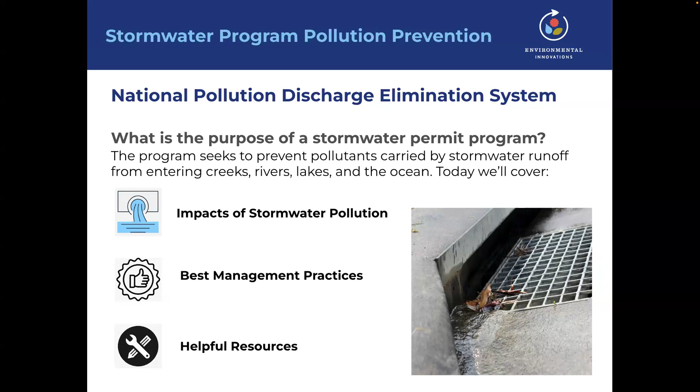So what are common sources of pollution in stormwater? These types of pollutants can come from businesses, public streets, and residential areas. The challenge of mitigating stormwater pollution comes from both the many types of pollutants and the wide range of sources.

Our streets are particularly dirty. Brake pads contain copper, which wears off with use and contributes to stormwater pollution. And grease and oil are transported to surface waters in stormwater runoff from runways, roadways, and parking lots. Other pollution sources include runoff from construction sites and land where metal-containing sludge, fertilizers, and pesticides have been applied.

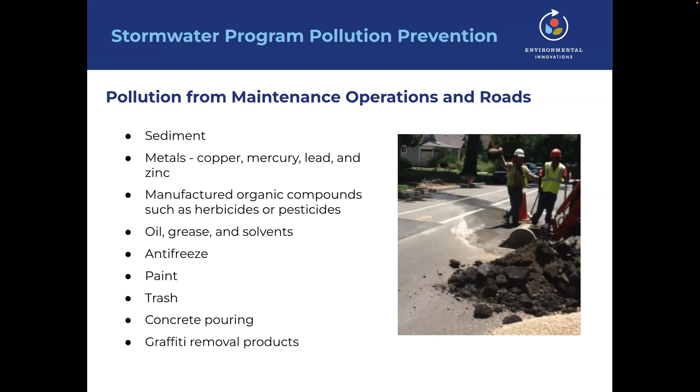One major source is concrete repair, which goes on all the time, and can produce high alkaline wastewater with a pH of above 12. So the impacts of stormwater pollution include risks to public health and degradation of waterways. The economic impacts are essentially the costs associated with managing the public health risks and the degradation of the waterways.

So now that we've identified the threats to stormwater, what are some solutions that have been found to mitigate pollution on a program-wide scale? Again, the difficulty with stormwater is it sort of comes from everywhere. So unlike point source pollution coming from a factory, it's hard to treat before it reaches our waterways. So there are many approaches, but these BMPs can be implemented by businesses at their facilities.

They include integrated pest management, careful mobile cleaning, implementation of low-impact development structures, which retain the water on site, and the protection of storm drains at all times. So when those maintenance activities are occurring out in the world, the storm drains are always considered and protected.

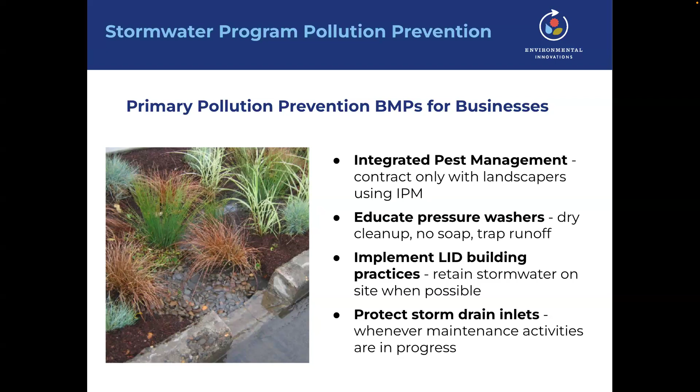So I want to spend a few minutes talking about integrated pest management because chemical pesticides tend to be over applied and they can persist in the environment for quite a while, and they kill or affect aquatic life. So effective IPM programs take a holistic approach and identify the life cycle and interactions of a pest with its environment. And just knowing that seeing a bug is not necessarily a problem that calls for action, as 90% of the insect world is beneficial.

IPM considers all available pest control methods, and a pest management plan is developed. And the plan attempts to use the most economical means with the least possible hazard to people, property, and the environment. So that would include things like finding physical barriers and things like that, as opposed to always reaching for the chemicals.

An IPM plan assesses the severity of the situation. Is it tolerable? Is it temporary? Did we welcome the problem? Cockroaches, ants, fleas, rodents all love food, water, and shelter. So identifying how to remove the attraction without using chemicals is the aim of the management plan.

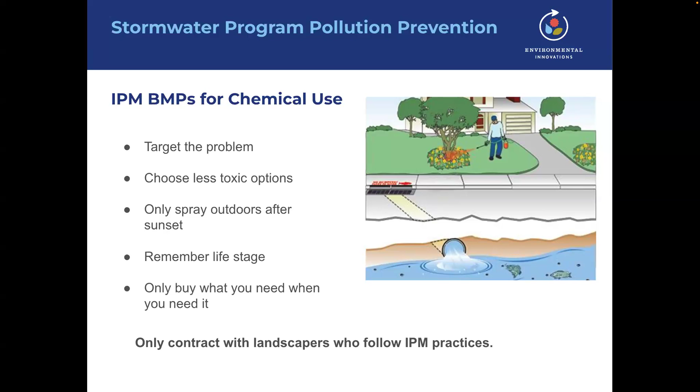And remember, this one is really important and is a big focus of IPM, which is remember the life stage of the pest. Some chemicals are designed to work when the pest is in the egg stage or the larval stage or the adult stage. If you apply something that isn't directed at the correct life stage, then it's not going to be effective at all, and you've just added chemicals to the environment for no reason. And if those BMPs are followed, the volume of chemicals used can be greatly reduced, which is the aim.

So pressure washers are another area where making sure that they understand how their actions affect stormwater or runoff that goes into storm drains is really, really important. Pressure washers can create a high volume of contaminated runoff. So it's important to contract with pressure washers and mobile cleaners, so maybe people who are doing mobile car washing, that kind of thing, who know how to keep contaminated water

out of storm drains. So there's a BMP fact sheet and a video that you can use to help educate mobile cleaners that I'll share with you at the end of the presentation. And businesses, property managers, and others should require in writing that the washers follow these BMPs.

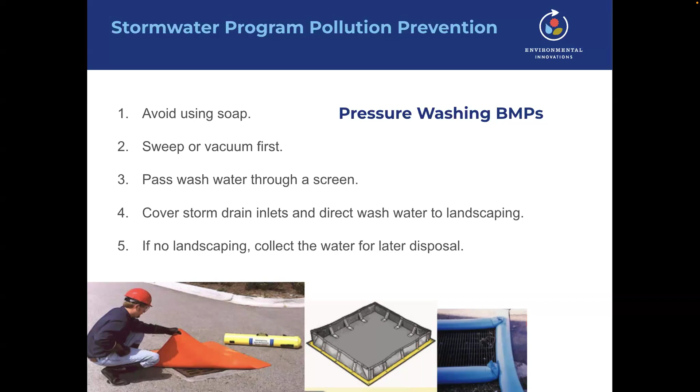So my favorite BMP is the low impact development. So these are structures that use plants and soil to capture and filter stormwater runoff, and allows clean water to recharge groundwater supplies. So it retains the water on site and sinks it, and lets the ground do the filtering. It's a little treatment that mimics natural processes in nature.

And so managing stormwater in this way is called low impact development, LID. And these development practices reduce stormwater runoff by keeping it on site via small scale stormwater technologies that mimic the way rainfall distributes in nature.

One example of an LID practice is this rain garden that you see here, which helps slow, capture, filter and infiltrate the water that runs off the impervious surfaces. So the design of the garden maximizes infiltration and retention. And then obviously it's placed in an area where the water will flow to it and sink in.

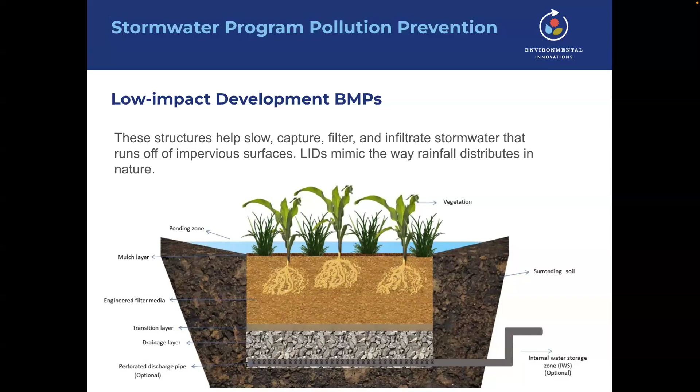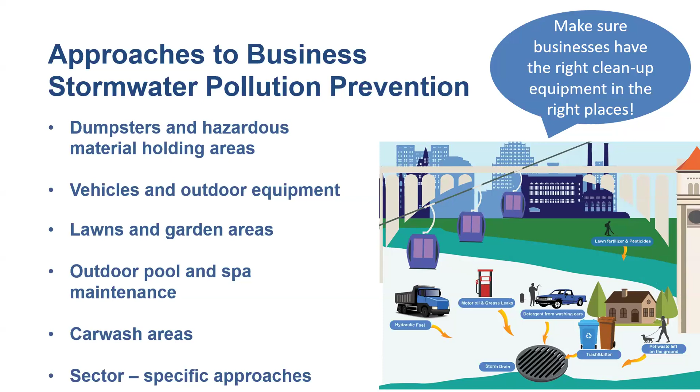Regularly inspecting and cleaning outdoor areas and picking up litter, debris, or cigarette butts are some of the best and easiest ways to reduce stormwater pollution. So you can invite a business to say, hey, who in your business is going to, once a week, maybe every 3 days, check the parking lots, check your sidewalks, check different areas of your building to make sure that there isn't that litter and debris, and that your outdoor areas aren't adding more pollution to our stormwater. So that's a basic that we talk to businesses about, regularly inspecting and cleaning outdoor areas and picking up that litter and debris.

Keeping surfaces clean by sweeping or mopping rather than using water. That is a measure in our checklist that we promote to businesses. Just making sure that whatever's on those mats or those surfaces is not being discharged into the storm drain, but rather into a sanitary sewer, if at all possible.

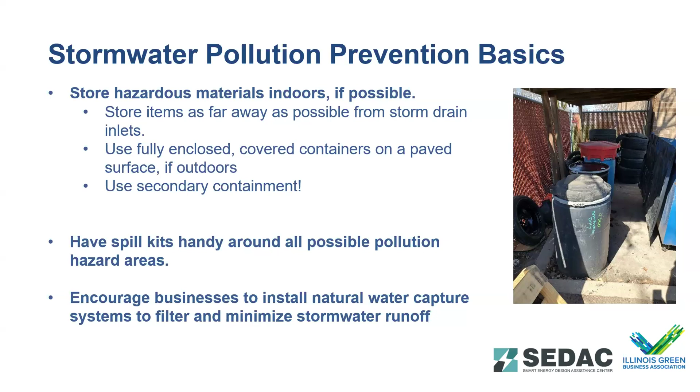It is not easy sometimes for a business to coordinate with their waste hauler to get new bins or get bins that are repaired. But working with your businesses to make sure that their dumpsters have tight fitting lids and those cracks or leaks are fixed is really important. We don't need any of that dumpster gunk going into our stormwater and going into our parking lots.

Thank you. So regularly cleaning litter and debris from these areas around businesses. I encourage businesses to do it daily. When you take out the trash, clean it up. Make sure that's a part of training and that your managers and owners are keeping on top of making sure that those dumpster areas are clean.

I know it's hard for some businesses, especially if they rent. They're sharing dumpsters with a lot of different people. And some businesses might not have the same best practices as the businesses that you're working with. So then I would recommend, say, let's go, and I'm happy to help you talk to your management about this and encourage other businesses to do the same.

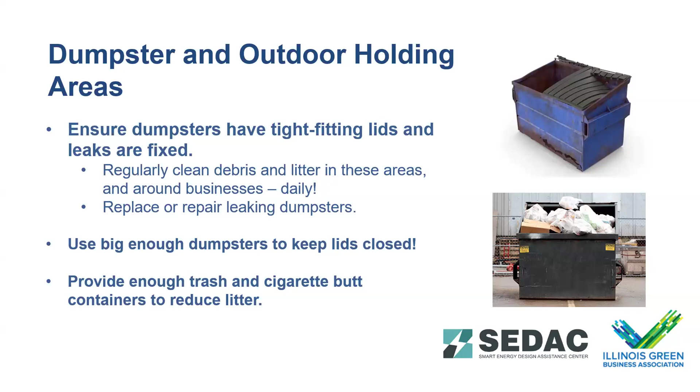So they had not only garbage cans closer to where those truck bays were, but also a big dumpster, and they informed their truckers and educated them: please drive to these dumpsters. There's garbage cans located here. Please don't dump in our parking lots. So providing enough trash and cigarette butt containers can really reduce that litter and reduce the amount of cleanup that your businesses and their employees have to do on their grounds.

Again, reminder signs are always a good thing. So having signage that guides employees on how to reduce the amount of pollutants entering the storm drains is a great best practice and a good reminder for staff. And then if you do have to rinse any containers, drain that into the sanitary sewer if need be.

And if a business does have a trash compactor, here's an example of a trash compactor, and here's a storm drain that's labeled, actually, right next to a trash compactor. Make sure those trash compactors are connected to the sanitary sewer and not the storm sewer. Please make sure that they are really not entering that storm sewer, if at all possible.

We don't have a lot of businesses that we work with that have trash compactors. We have some, but that's a best practice that I really make sure to emphasize with those folks that do have trash compactors. We don't want any trash goo going into our storm drains.

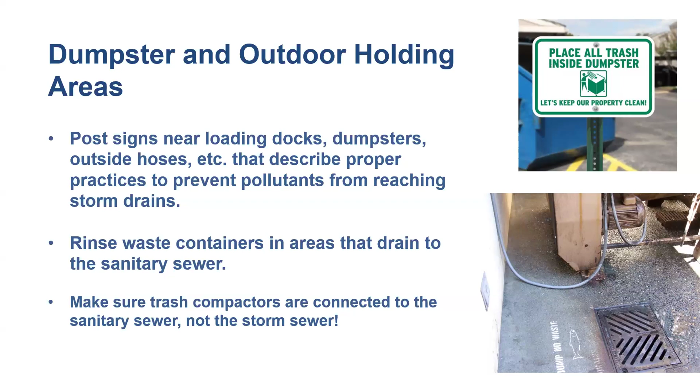All right, let's shift a little bit. Vehicles and outdoor equipment. Most businesses, or a good percentage of businesses, I'd say, have some sort of company-owned vehicles or outdoor equipment that they use. So one thing that we don't think about a lot when we're working with businesses is, where are they washing those cars? Are they filling their mowers or string trimmers in an area where a storm drain is located?

So we talk to businesses about fixing oil or other leaks in company vehicles and outdoor equipment to prevent spills. So advise your businesses, please don't fill your outdoor equipment in an area next to a storm drain. I know some people spill a little gas or a little diesel. That doesn't need to go down the storm drain. Make sure that you're in an area that not only is not near a storm drain, but that can be contained, and there's a spill kit available if those spills do happen. That's why I say, clean up the spills. Don't just leave it there. We talk to businesses a lot about that.

And also, when cars are being washed, make sure that that wash water is not entering the storm drains as well. If they are, there are some good berms and different things you can place around storm drains to reduce that commercial car wash water from going into the storm drains. But we also recommend that folks use safer cleaning solutions for car and truck washing.

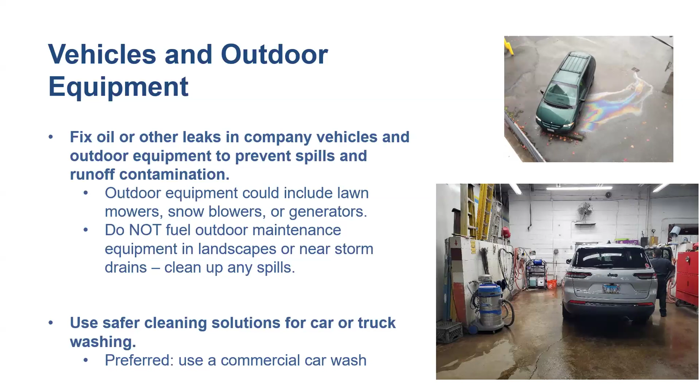Lawn and garden areas. Julianne really spoke about some great best practices around IPM and the use of fertilizers and outdoor pesticides. So I won't repeat a lot of that, but I'll just share some different best practices that we talk to our businesses about. So developing a policy that states that businesses will only use fertilizers and pesticides when needed.

That measure that I showcased earlier around working with their pest control companies at an as needed basis rather than a regular schedule. And I actually have a lot of businesses that take that on, that ask their pest company, do you use IPM practices? What is our schedule? And do we need this schedule all the time? Can we do it on an as needed basis rather than a regular schedule?

And we get that in writing from those pest control companies that our businesses work with. So we do have a lot of businesses that take this best practice on and make sure that they're using IPM best practices on their landscapes and inside their buildings.

Requesting a pest control and then using organic fertilizers. The OMRI label is one that I refer to a lot, and working with your landscaping companies to make sure that that is what they use. Making sure that you're also using mulch and compost in garden areas or planting areas rather than fertilizers. This is going to generally be regional on this practice.

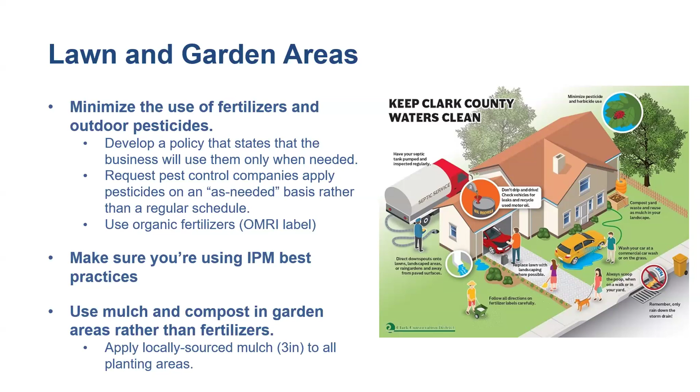In Illinois, we say at least locally sourced mulch 3 inches deep, but that also helps with reduced watering, which is also a benefit. But that is something that we talk about a lot with our businesses. Another thing that I didn't put in here is that we also talk to our businesses about making sure that if they have irrigation, that they check that system regularly and they're not overwatering, especially after fertilizers and other outdoor pesticides have been used. So that's another place where runoff can happen and those sorts of things can enter into our storm drains.

This is an example for lawn and garden areas, IPM tactics for ants. I know it's ant season here in Illinois right now. All the ants are coming out and we're finding out where they got in last time, and they make an appearance. But you know, things like first thinking about vacuuming, wet cleaning, pest proof areas and pest proofing, like caulking holes, fixing leaks, and cleaning up ant trails.

And then you go into biological. Can you do something outdoors rather than going to chemicals? So this is just an example of what Julianne was talking about in terms of timing, approaches, different strategies. But IPM, we should think about these things first and recommend these types of best practices to our businesses.

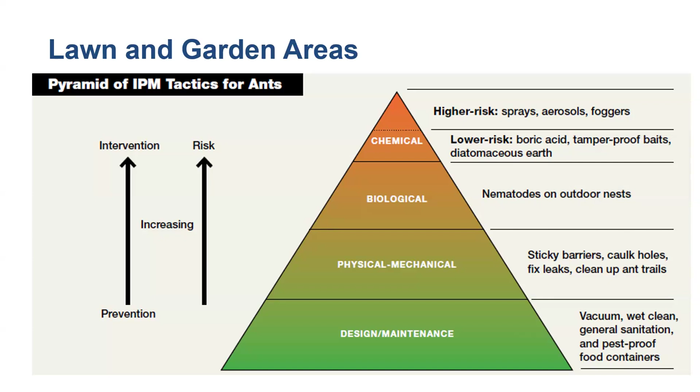Like, do you have good weather sealing around your warehouse doors that prevent pests from entering your buildings? Have you caulked those holes? Have you done things to pest proof your facility? And then what can be done biologically or chemically? And you can work with your pest control companies to determine these different strategies as well.

If vehicle washing is common, I think really recommending that they use a commercial car wash is the best practice. Since they have that filtration capability, they make sure that that water is not entering the storm drain. A commercial car wash is going to ensure that that water is going into the sewer system or being filtered before it enters our sewer system. So that's a really great best practice.

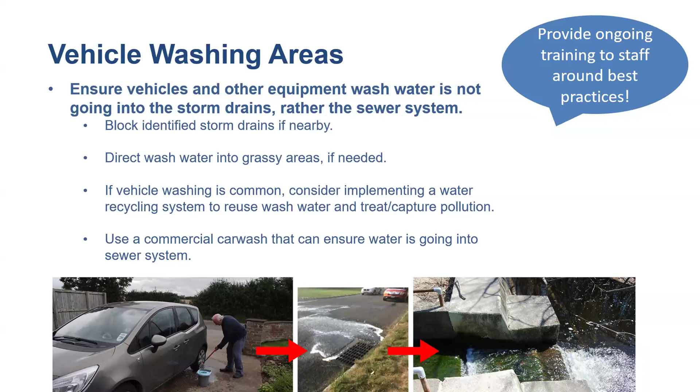It actually helps reduce the amount of spotting on cars if you use things that are biodegradable or phosphate-free and use those high-pressure nozzles. So if you've ever been in a car wash yourself personally, and you see you still have those flecks or spots on your car, and you've used the kind of soft wash rather than the pressure wash, that might be a symptom of not using high pressure nozzles, and it actually reduces the need for soaps. And of course, using credible third-party certified cleaning solutions.

Outdoor pool and spa areas. We get questions from businesses sometimes along these lines, but here's just some best practices. We do not discharge pool water directly into the storm drain. You have to allow the chlorine levels to degrade and neutralize before discharging that water into the sewer system. So if your businesses have a storm drain nearby and that's how they drain their pools every year, please tell them that's a no-no, and they have to take some best practices to discharge that water properly into the sewer system so that water can go to the wastewater treatment plants and get treated properly. Saltwater pools particularly have more bromine in them and can add more pollution to our waterways than chlorine pools.

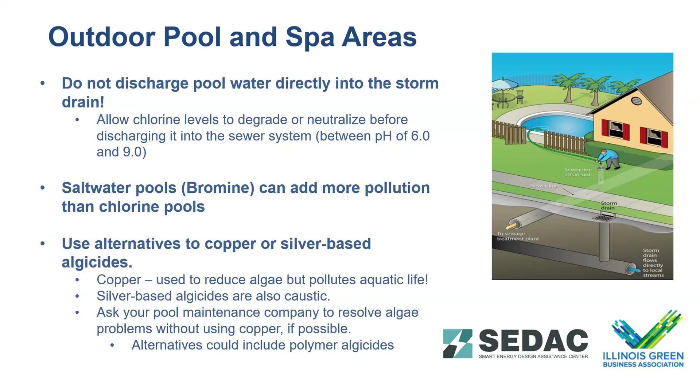And we talk about, too, if pools are cleaning their filtration systems, we'd say never clean that filter in the street, gutter, or storm drain. Rinse the filters on a dirt area and spade that filter residue into the soil and send that old filter to the trash. So that's a big recommendation that we provide when pools are making sure that their filters are clean. And then sometimes pools need to be backwashed through that filtration system to clean out any debris and gunk. Make sure that filter backwash discharge doesn't go into the street or the storm drain and enters either landscape areas or a sewer system. So there's a lot with pools that we can work with our businesses on to make sure there are really good practices that reduce stormwater pollution from that either chlorinated or saltwater pool.

Actually dumping grease and not doing it properly or not cleaning up spills afterwards. So making sure that you have a training program for your staff on how to clean up those spills is really important. Making sure you close the lid tightly and bringing a rag to the bin to clean up these spills, whether they be on the top of the container or on the side of the container, are really important as well. And then if you can store that container in a covered area, that is preferred as well to reduce greases and fats and oils from entering the storm drains.

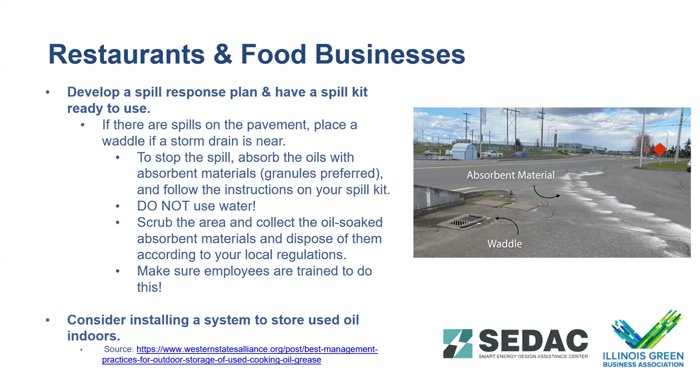So we've talked to businesses a lot that have these sorts of issues, say, are you doing anything to train your employees on how to actually dispose of your used cooking oil and grease? If you don't, here's a great video that you can use in staff training. Here's some good materials that could be helpful to help you reduce spills and clean up spills when they happen. So there's also some neat technology where restaurants can actually install systems indoors to store used oil and then have a connection that their grease or oil hauling company can use to collect that material. So again, making sure that you have that spill response plan, having that spill kit ready to use, and doing that training can really reduce this situation right here. And we often work with businesses, particularly our restaurants, with those things.

For auto body and repair shops, checking UIC wells is really important. So underground injection control, there's a little injection well here that a lot of auto body shops have, and making sure that they know where those are located, making sure they understand where they discharge, if they discharge at all, and then if they're closed, making sure that they're not leaked or damaged, so that hazardous material like your gas, your brake fluid, your coolant, your used oil is not going into your groundwater and polluting our groundwater here. So an underground injection well is basically a holding tank, and there are so many P2 best management practices that can even reduce pollutants from entering these types of systems.

But if these systems exist, we're talking about stormwater today, not all of these different practices inside of the buildings. There's tons of P2 best management practices that reduce even the amount of things that are entering those UIC wells. But that is something to talk to your auto body shops about. What is happening with those materials? Is it safely stored, and is it affecting groundwater? Because we don't want that.

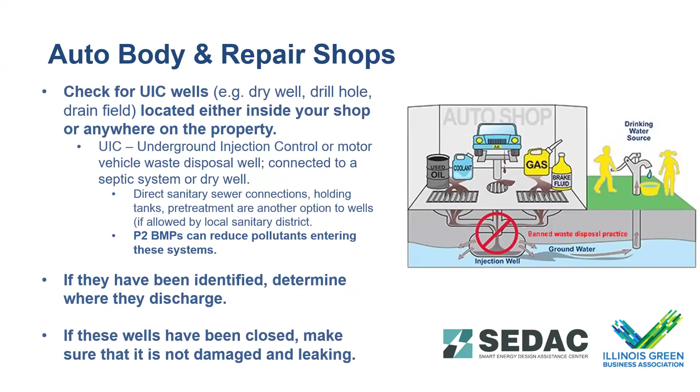Car wash facilities, and this is my final pollution reducing slide, particularly here. Car wash facilities, we recommend that folks look into biodegradable soaps and chemicals instead of solvents.

So car washes are pretty good in terms of capturing that water, making sure that it is either going into the wastewater system or mostly being filtered before it goes into the wastewater system. So in Illinois, car washes have to have a discharge to sewer systems or holding tanks.

Sometimes they're required to have water softeners or filtration to lower the total suspended solids in the water, because those total suspended solids transfer through the wastewater system, and then the wastewater treatment system has to deal with that. So sometimes filtration can lower the amount of solids entering the sewer system. And even those water softeners or filtration can reduce spotting as well, which requires less detergent.

So filtering solids, usually your car washes do filter it, most do, and that needs to be either disposed by drying or sending it to a landfill or through a specialized waste disposal company. So, you know, when I talk about washing cars at businesses, this is a really good and important best practice to say, if you can, take it to a commercial car wash because they capture a lot of these different sorts of materials and items, and make sure they don't go into the storm drain.

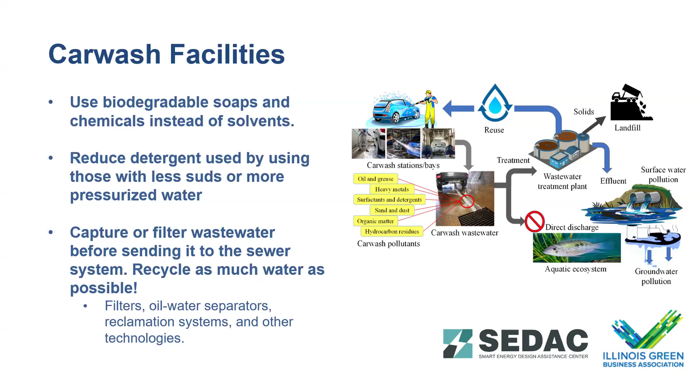So for car washes specifically, biodegradable soaps and chemicals instead of solvents are really good best practice, so it doesn't enter into our wastewater plants or go into our stormwater drains. Reducing detergent by using those with less suds or more pressurized water is a great best practice, and then that filtration. There's all sorts of different technologies for filtration. There's filters, there's oil water separators, there's different reclamation systems. There's lots of technologies out there. So car washes, again, are a really important part of reducing stormwater pollution.

But I would be remiss to be on this webinar without talking briefly about sewer system pollution. So we've been talking a lot about stormwater pollution, but don't forget about sewer systems as well. Anything that you send down the drain impacts what kind of treatment is needed at the wastewater facility. Here in Illinois, our plants are facing more regulation because of the amount of nitrogen-based items and phosphorus-based items. We're also looking at microplastics as well. But more regulations around nitrogen and phosphorus removal are needed because of what's going down the drain.

So even in your businesses, and if this is another webinar that we want to have to talk about those types of systems, let's go for it. But make sure that you have proper hazardous waste disposal and cleanup. Those cleanup and spill kits are really essential, so even those pollutants aren't entering the sewer system. Fats, oils, and grease going down the drain also impact local wastewater facilities, and they have to do extra treatment for those types of things. And don't forget, don't flush your medicines down the toilet or down the drain. Properly dispose of them and PFAS containing items.

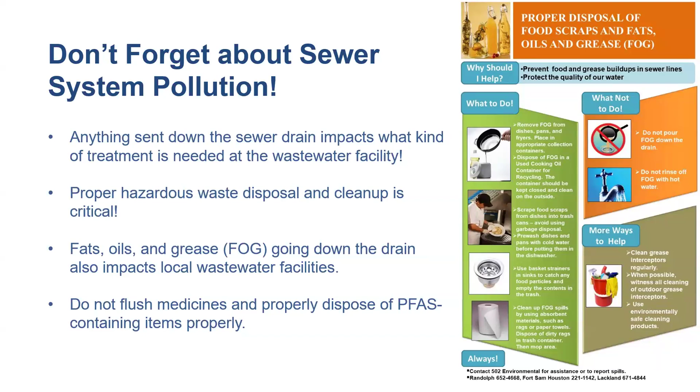So this is a graphic for fats, oils, and grease from the Pollution Prevention Resource Center and Western States Alliance. This is a great graphic to include in reports or send to your businesses about what to do around fats, oils, and grease and what not to do. And they have some wonderful training as well as a technical resource library that has case studies about impacts at local wastewater facilities, different sorts of guides and booklets that can help you work with your restaurants or your businesses with fats, oils, and grease.

And if you are like, man, my head is spinning, this is so much information, there is a network of green business programs that can help. So if you have any best practices that you'd like to share, or different sorts of pollution prevention or stormwater pollution prevention programs that you'd like to start with your businesses, the Green Business Engagement National Network is a consortium of 30 green business programs across 16 states, and we're here to help. So tap us. Work with us, reach out to us, anyone on the webinar, but also feel free to reach out to our national network of green business programs that are doing this on a regular basis and can provide some really great case examples of how you can adapt these best practices for your business engagements.